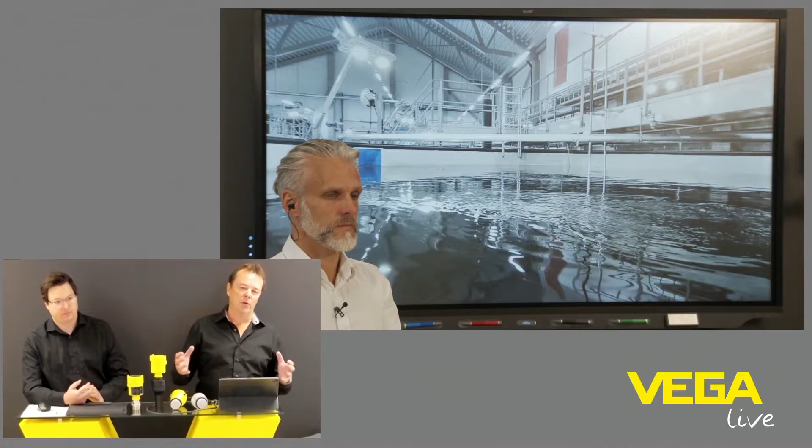In hatcheries, the small fish are born and live in small tanks on shore in the beginning. Then they are pumped into bigger tanks, which traditionally were located outside, beside a river or the sea, so they have access to plenty of water. You can imagine the harsh environment we have here in Norway, and worldwide, with lots of wind, rain, storm, and even snow. This makes a big impact on the measurement.

Today, most of these tanks are located inside because there you have better control of the environment, and you can also play with the temperature and the light. But inquiries and demands for these instruments are increasing, so we need a good, reliable sensor for everything.

So we thought we should give you some practical examples today, so you can see the difference between the ultrasonic and the radar. Let's start with the rain. It's not so easy to bring the rain into the office for you, Volker. But after rain there is always sun, so maybe you can show us what happens when it's sunshine.

Definitely, as you said, it's not a good idea to bring rain here into the studio, so we decided to show you another effect. To show you the difference between ultrasonic, which is this sensor, and the radar sensor on the right side, we have prepared this model for you. Both sensors are connected to this display, and you can see they have nearly the same value that they detect. Now I want to use this warm air blower to show what happens when wind is coming.

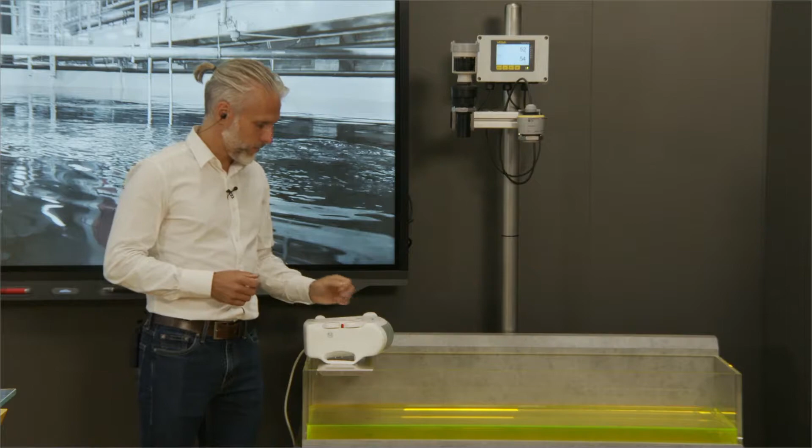So no rain, but wind, and especially what happens when there is warm wind, like we have now with this warm air blower. I'll turn it on right now, so a little bit of wind is coming. What is happening right now is the same as when you are talking to a friend close to the coastline. Due to the wind, sometimes you may not understand a word in a sentence - a word is missing, and then you have to ask again, hey, what did you say?

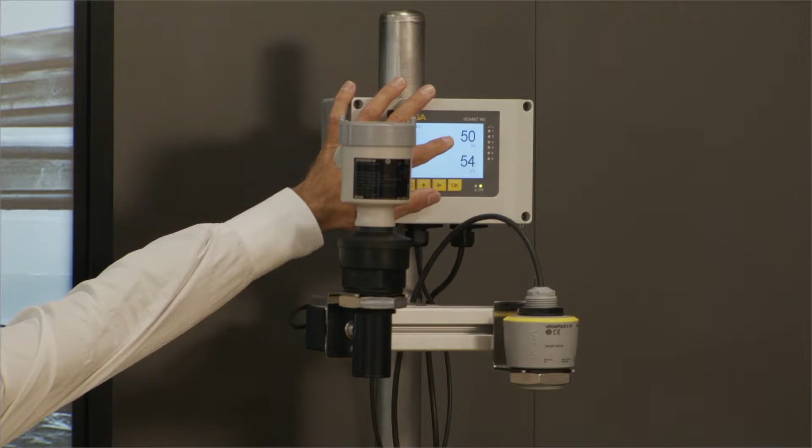This is the same with ultrasonic, because it is a mechanical wave, and due to that fact, the wave is blown away by the wind. You already see right now that the value from the ultrasonic sensor has changed from more than 50 to sometimes lower than 50. So there is a big impact on the measured value, and you may have big trouble when you measure with such an unreliable technology in your process.

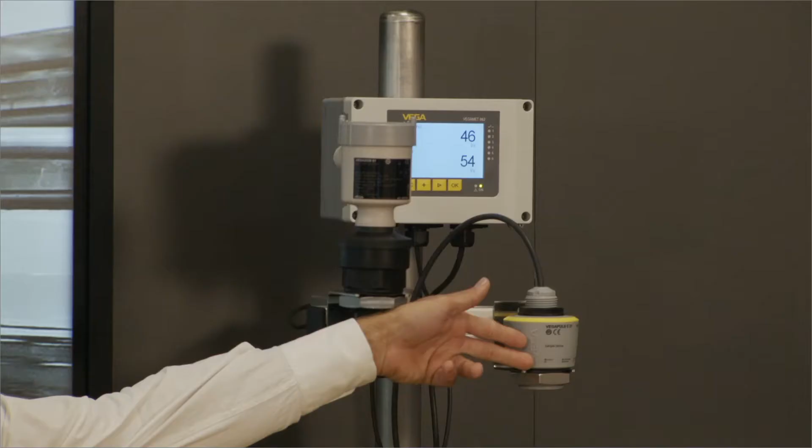Due to the fact that the radar sensor is not a mechanical wave, it's an electromagnetic wave, it is not influenced and not affected by warm air. So we have a reliable measurement with radar compared to ultrasonic. This is the first difference between those two technologies, and you see that radar is much more reliable when doing only a simple measurement in the tank of your fishes.

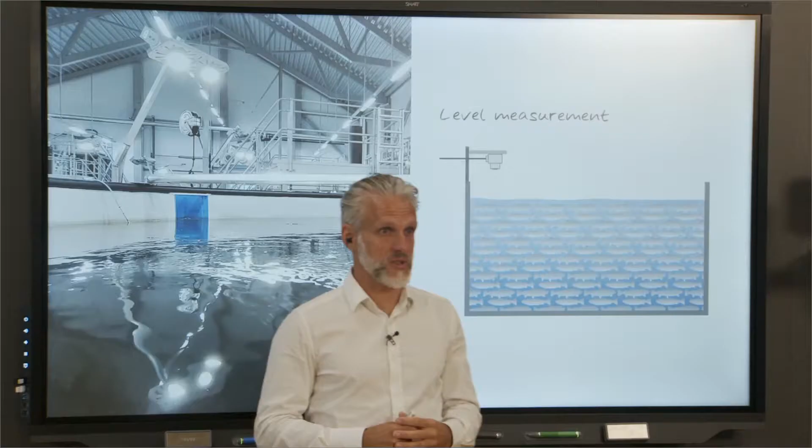So this is not the only technology we have, we have more. Right now we want to talk about another effect when comparing these two technologies. Nils, would you please tell me about another effect? I guess there are some more.

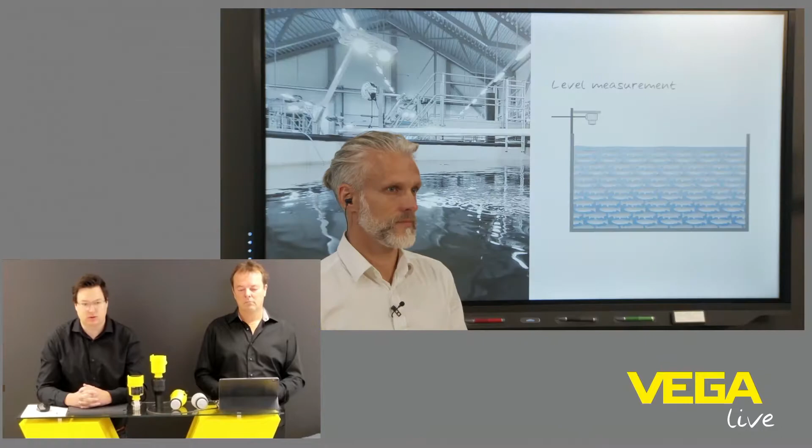Yes, it is. The fish tank is normally located outside, but we also have seen that some of these tanks, the new plants, are located inside. Due to the weather challenges, when the tank is located outside, the surface in the fish tank could be fluctuating. When we are also feeding the fish, there will also be a fluctuating surface, and both of these could be problems for a non-contact level measurement.

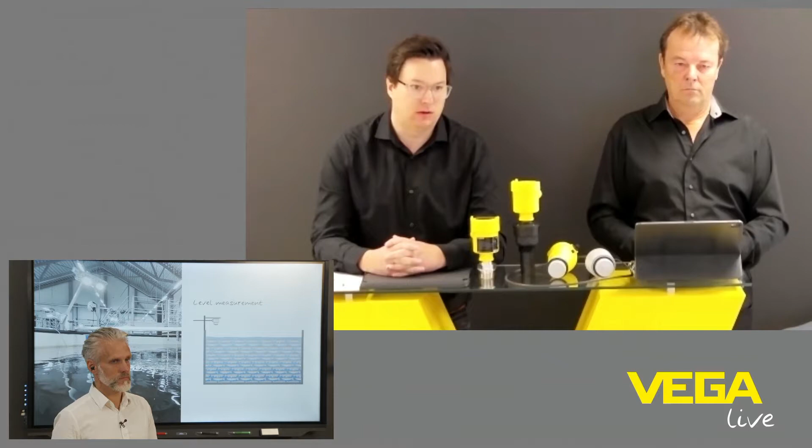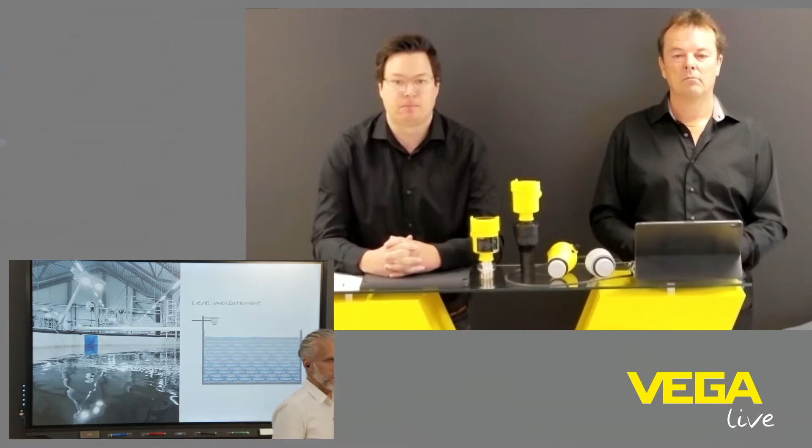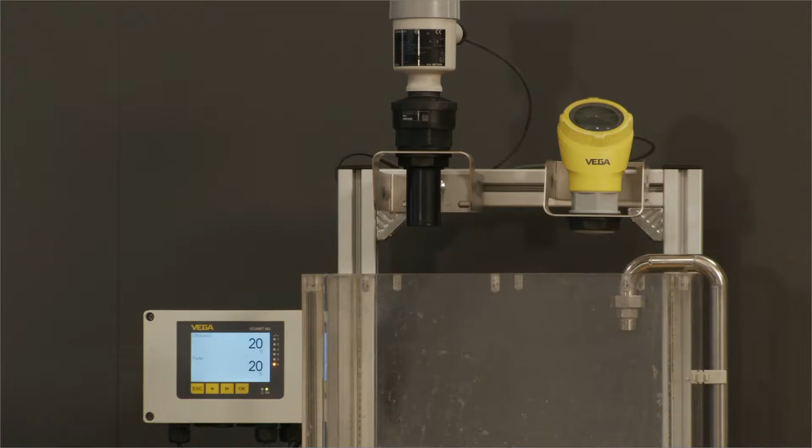So Volker, will you show us what happens between the ultrasonic and radar technology when the surface is fluctuating, for example in the fish tank? Yes, there is an effect, and this effect is very big when using technology like ultrasonic. To show you this, I have prepared this model here next to me - again, ultrasonic mounted on top and a radar sensor mounted next to it. Both show 20% of value, so both have a reliable measurement, but the water surface is stable, nothing is moving.

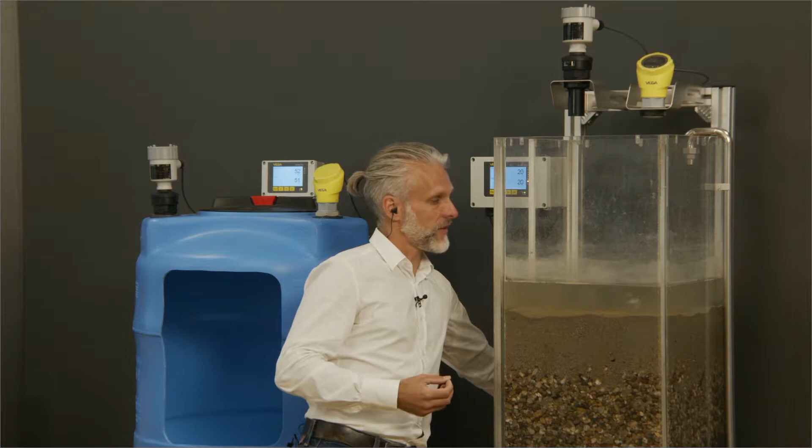Now I want to show what happens when bubbles are coming up. So please look what happens, even after a few seconds, bubbles coming up and causing a fluctuating surface. The ultrasonic has lost the value after only a few seconds.

The radar is still completely reliable, no change of value due to the fact that it's an electromagnetic wave and is not affected by such bubbles by a fluctuating surface. So this is one big advantage of radar.

There is another technology. We have not only radar, we have also hydrostatic pressure measurement, like we have with this sensor. This sensor is made with a ceramic cell, and this ceramic cell has one big advantage: it is very robust. So even when the sensor comes into a rough layer on the bottom of the tank, like this sand example, the ceramic cell is not influenced at all, and even in more harsh environments, the sensor is not affected by things like that.

You can get the sensor from us with a different cable length like you need. It doesn't matter which length, you can simply tell us and we will be able to deliver that for you. So this is the hydrostatic pressure measurement called VEGAWELL, a very well-known sensor used in big quantities over many decades.

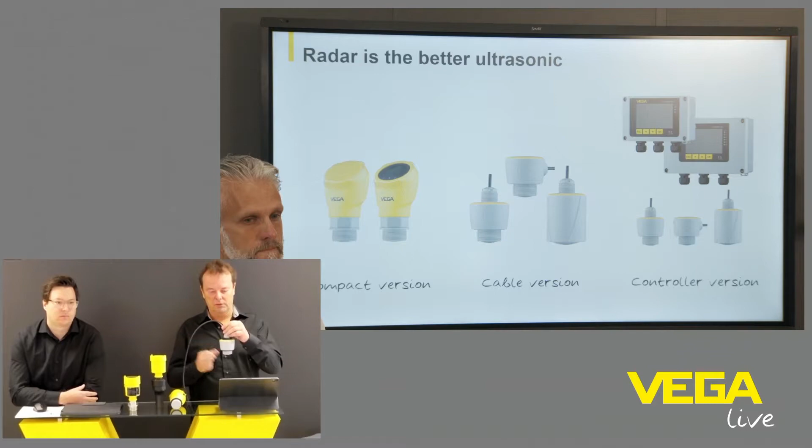So this is the radar, different versions we have. You can have them in an IP68 solution with a cable directly fitted on, in different sizes for different sizes of silos. Or if you like, you can have it as one complete unit, also with the possibility of an indicator. So these are the two versions that we have.

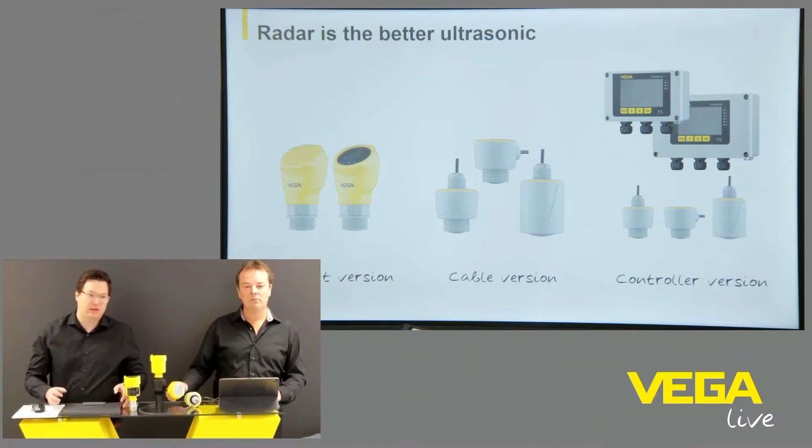And Nils, do we have other applications in this industry? Yes, the next application we want to talk about is the silage tanks. This tank, the silage tank, is a tank containing fish waste. The silage is normally used for manufacturing animal feed.

To stabilize the pH in these tanks, we add acid named formic acid. The silage is a very harsh medium. So if you want level measurement in such tanks, you need a technology that can handle the acid, the buildup, the cleaning products, the foam, the gas, etc. So it's not very easy to have level measurement in such tanks.

Paul, would you mention or show us the first top-mounted solution for level measurement in silage tanks? Yes, but first, did you know that formic acid absorbs sound waves? So it's important to choose a technology which is able to handle the condition inside the tank. In this case, we will use a radar, and maybe we should show the audience the difference between ultrasonic and radar when it comes to gas.

Volker, you have to help me since you are in Germany. Can you please show us the tank with the gas? Yes, I can.

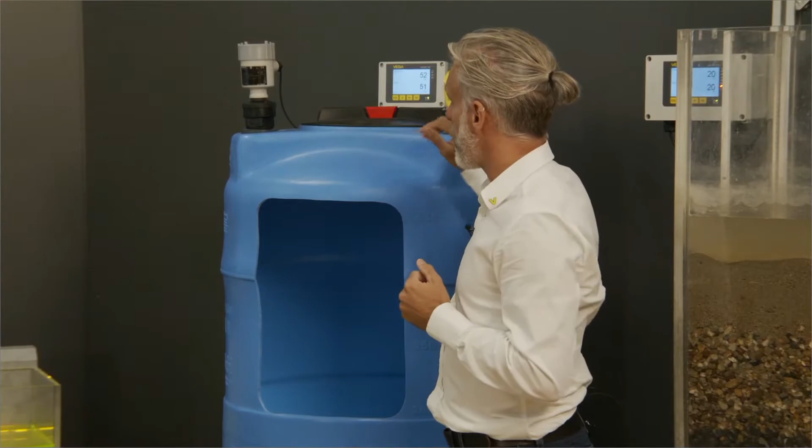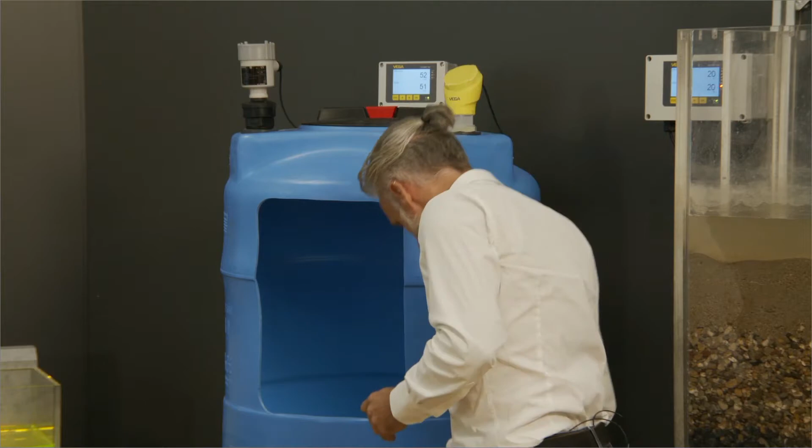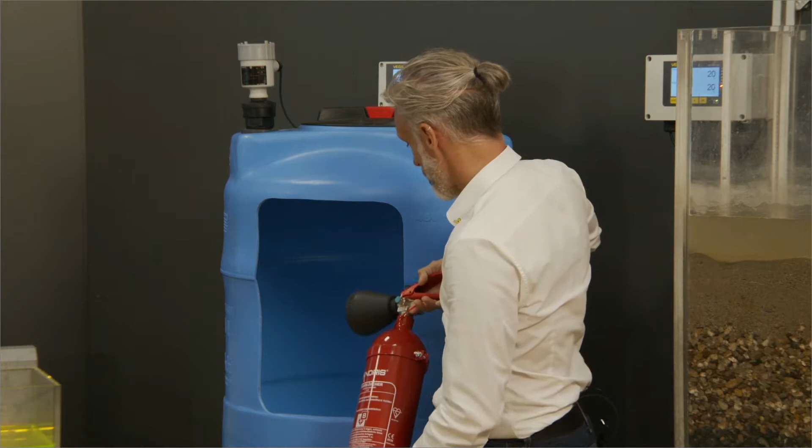As Paul said, gas affects ultrasonic, and ultrasonic is a mechanical wave. But radar is an electromagnetic wave, and that is not affected by gas layers. I have this model next to me, where we again have our ultrasonic sensor and our radar sensor. Both have nearly the same value that they measure, and now I want to show you what happens when I create a gas layer on top of the liquid inside this tank. For that, I have this carbon dioxide here, and now I want to blow some carbon dioxide into that tank. So give attention. 3, 2, 1, go!

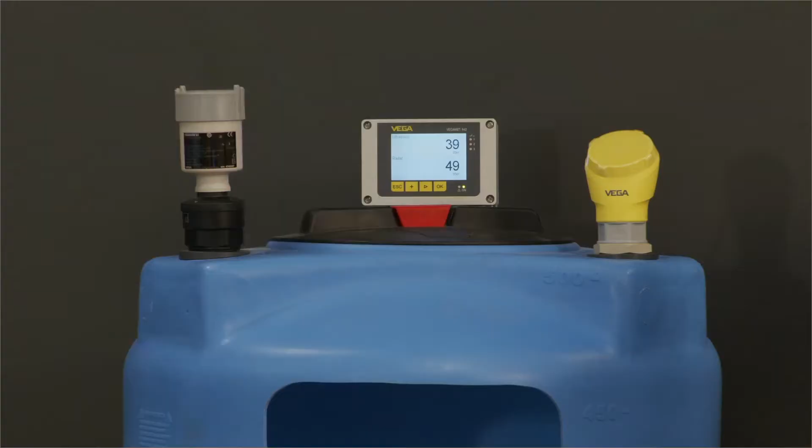You immediately see a really big impact on the ultrasonic sensor. The ultrasonic sensor shows a change of more than 20% of the value. This is due to the gas layer on top of the liquid. Whereas the radar sensor is stable and does not show any influence on the value. This is a big difference, and especially in this application, it may help.

Furthermore, there's another advantage that I want to show you: you're able to measure through the tank wall. Because radar is not affected by plastic, you're able to measure without a hole in your tank wall. So this is a very big advantage of radar and can help you when you do not want to have any holes in your tanks.

So this is the advantage from our top-mounted solution. Nils, do we also have a bottom-mounted solution that can help?

Yes, we could use a pressure transmitter mounted in the bottom of the tank to measure level in the silage tank. And when we are talking about level measurement in such a harsh medium, we need a sensor that could be in contact with the acids and cleaning products in the tank, but we also need a sensor that could easily be cleaned if necessary.

So this is the VEGABAR 82, our high-end pressure sensor with an absolutely front flush ceramic version. We also added a seal inside that could handle the formic acid and the cleaning products. You could also take the sensor out and easily clean it with a steel brush without making any damage to the sensor.

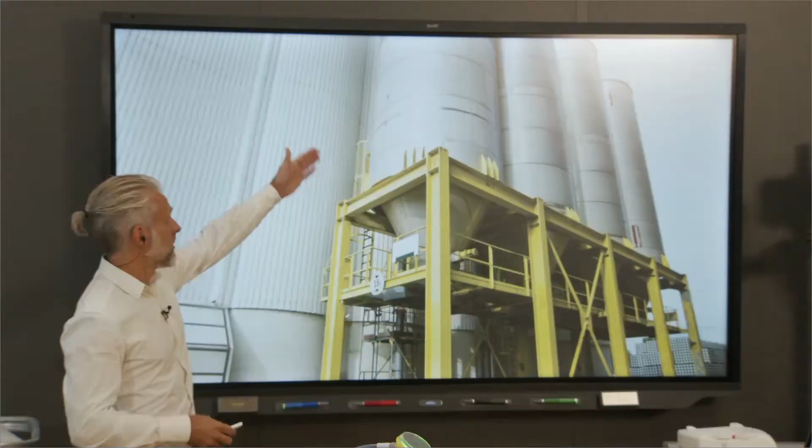So of course, not only chemicals, not only silage is in the process. Of course, the salmon grow up from 0 up to 5 kilograms. They need more, they need food, they need a lot of food. And for that, companies produce fish food. They are on site, typically close to the coastline, stored in big tanks.

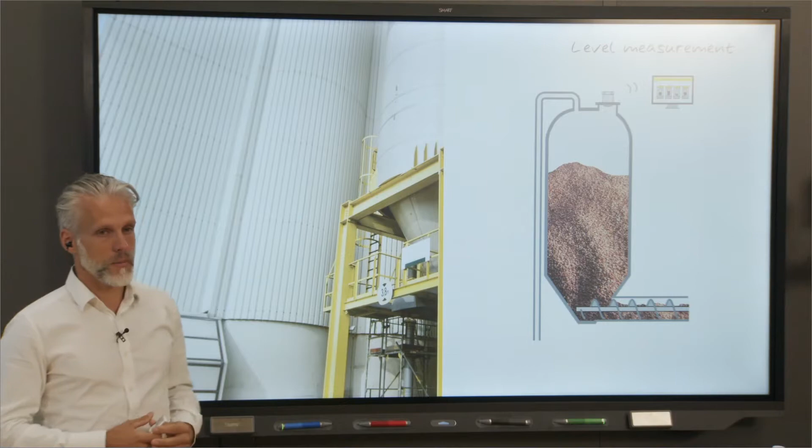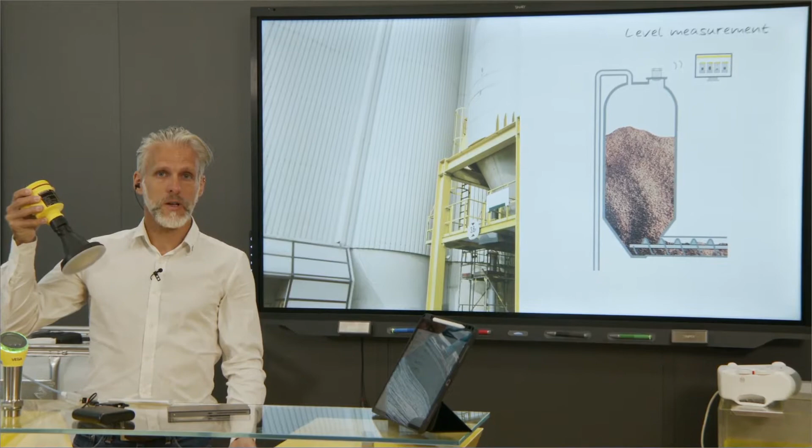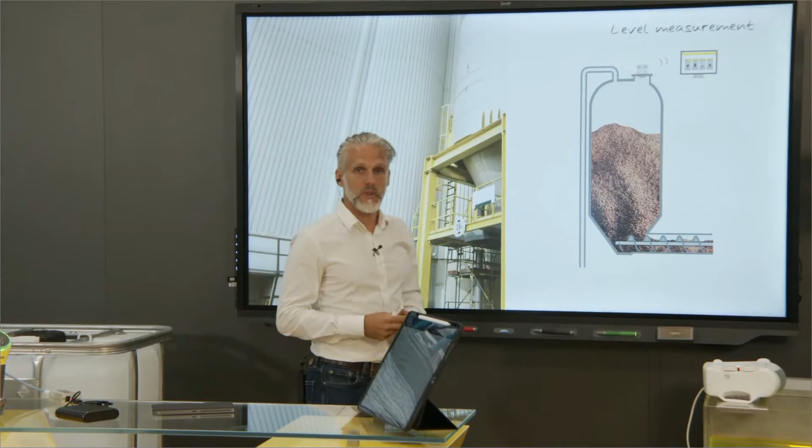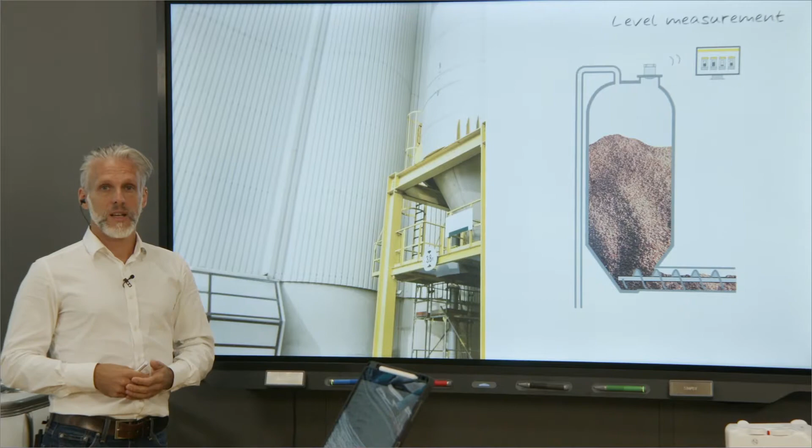And there you need a measurement. This measurement can be, for example, our VEGAPULS 69. The VEGAPULS 69 is our solution for up to 120 meters of distance to measure. This sensor has very good sensitivity and helps you to work even in those dusty environments where the fish food may create build-up or a dusty environment. The VEGAPULS 69 is mounted on top, like always with our radar sensors, and it can handle those difficult measurements because it has to deal with build-ups and the dusty environment created from the pellets.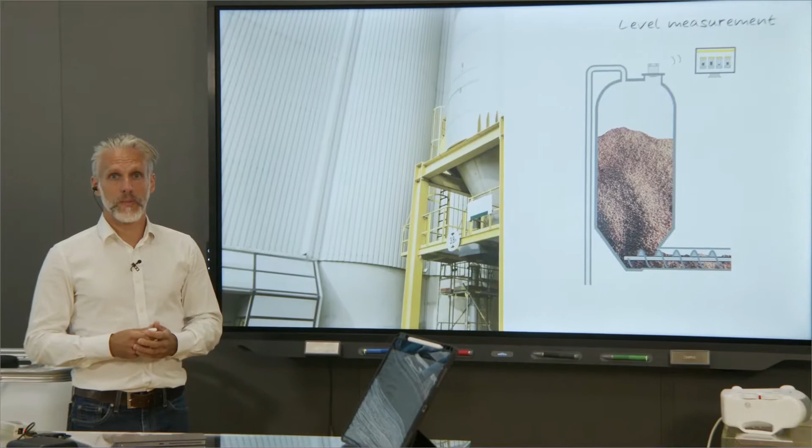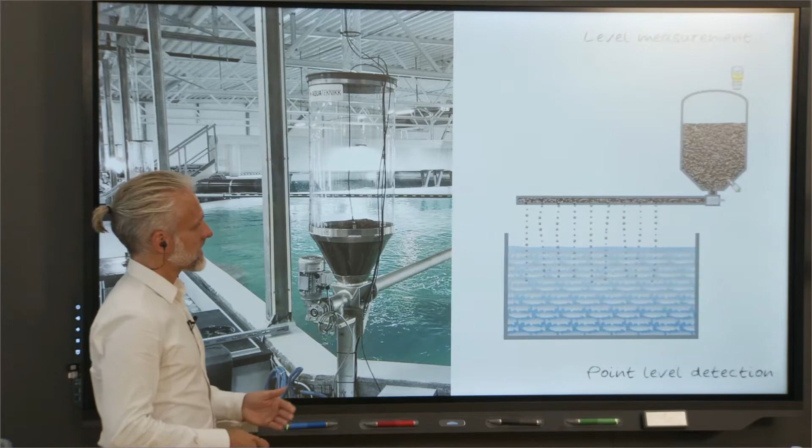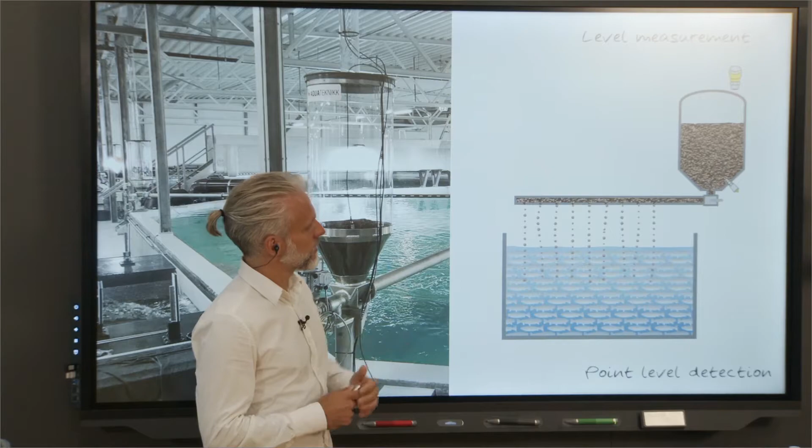Then the food needs to come to the place where the fishes are. It's the fish tank again, and there you have a feeder close to the fish tank, which brings out the food pellets to the fish. There again, you need a measurement that is reliable, and here again radar is a very good solution because it can measure through the glass. It is possible to mount the sensor outside of the tank, so you have no contact with the food, and can then ensure you have no things in your tank that you don't like to have.

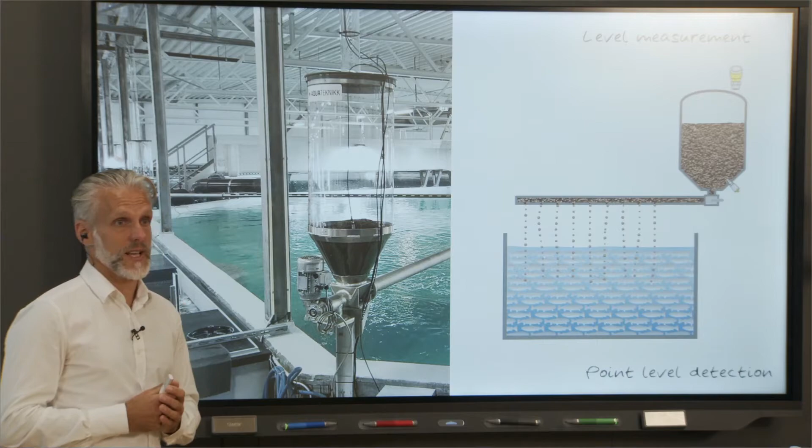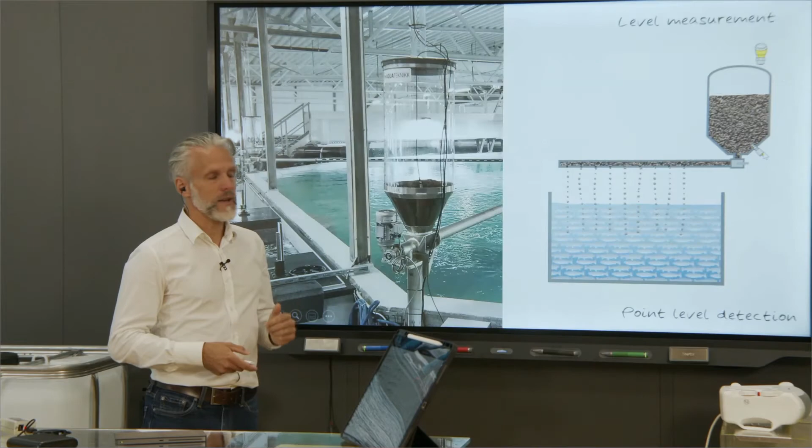Maybe you need a dry run solution, and for that we also have a solution. It's a point level detection on the bottom side of that tank if you want to prevent any kind of dry run close to the engine.

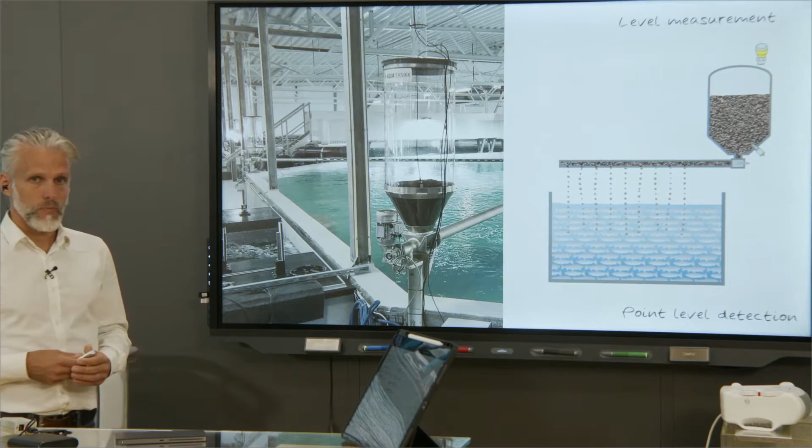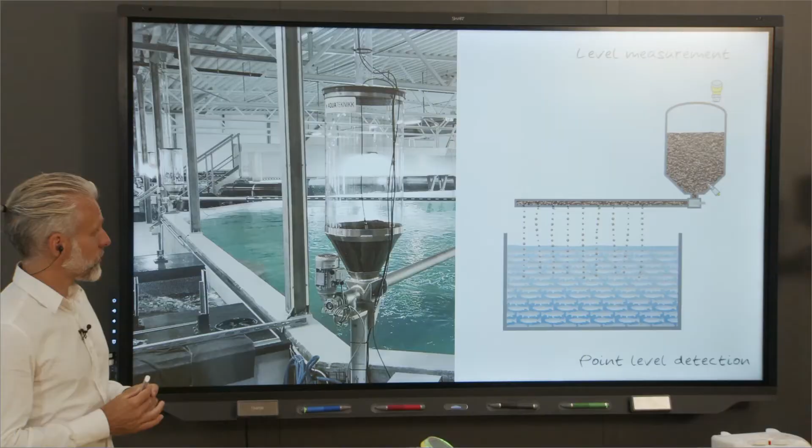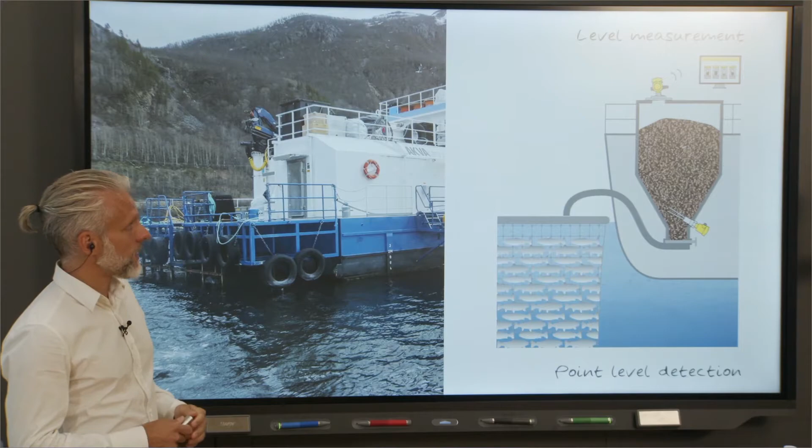So when the fish have grown up, they go outside, to the so-called grow-out tanks, which are typically offshore when salmon is produced. And when the fishes are offshore, they again need a very big amount of food, and this food is typically stored in feeding barges. These feeding barges have a few tanks inside, and there again you have the possibility to use our VEGAPULS radar sensor on top of the tank to send the data to a cloud system and manage your feeding and logistics.

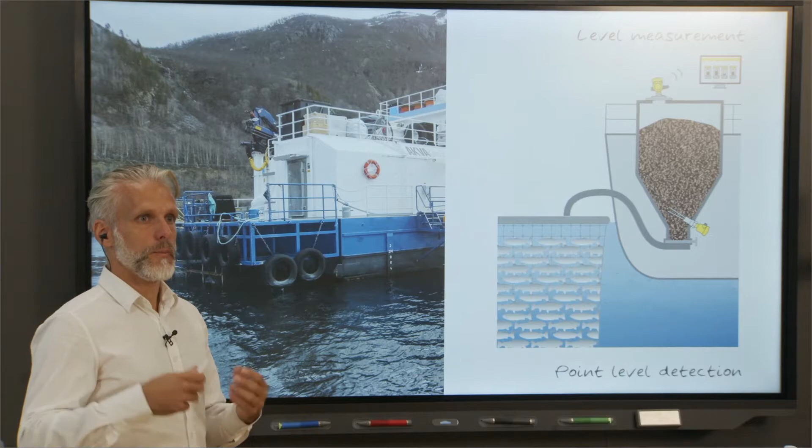Furthermore, you want to prevent that there's any dry run, so therefore we also have the possibility to add such a point level detection on the bottom side of such a tank. Be aware, these are ships, and for sure there are quite a lot more applications here. There are diesel tanks where you want to store some fuel. There are ballast tanks. There are many, many more pressure measurement locations and measurements which can be done by VEGA

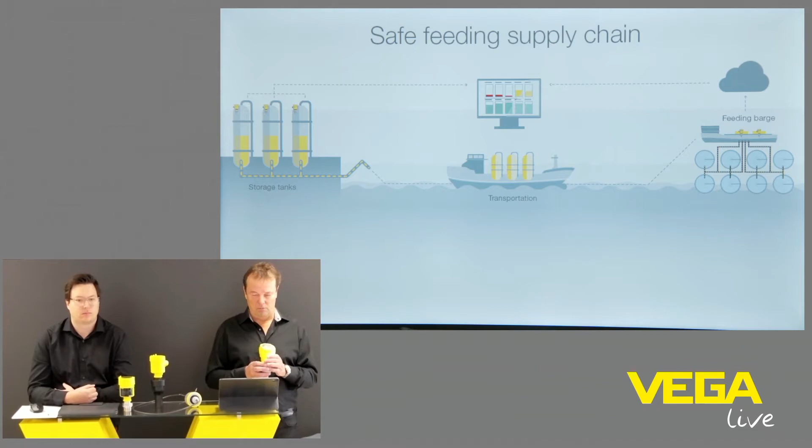The sensors on each location are exporting the signals in different ways. For example, it can have a built-in SIM card and act like a mobile phone. We are using the NB-IoT. Maybe also you are familiar with the LoRa networks, and if not, we can inform you about this. Maybe you have a network already, and if not, we can make one for you. So these are the different possibilities we have for displaying in the unit.

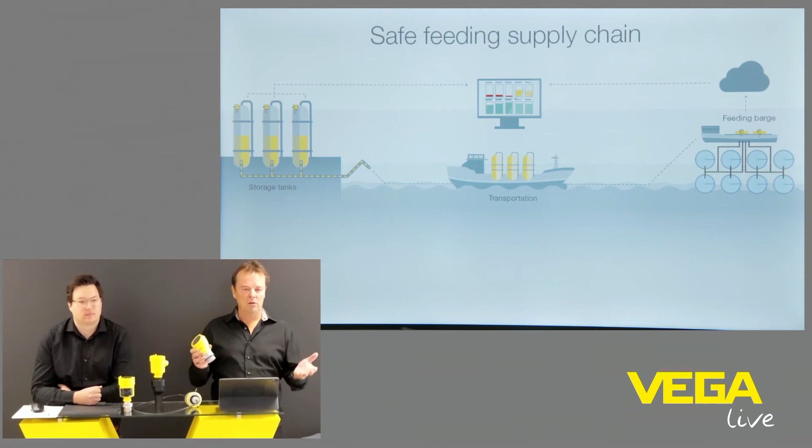And all of our sensors, they are calibrated at the factory. So a radar knows that a meter is a meter. But Volker, we need to set it up when the customer receives the sensor at site. We need to adapt it to the local application. And for this, we need a simple way of doing it. Can you tell us about a simple way to set up the sensor? Can anyone do this? Yes, of course.

We have one of the easiest solutions that you can imagine. You can do it by a smartphone. You can set up our sensors from everywhere. So stand 5 meters away from where your sensor is mounted on top of the tank and connect to your sensor by using our VEGA Tools app. This VEGA Tools app, which you see here on this tablet, is available free of charge in all our app stores worldwide. So it's free of charge and available all over the world.

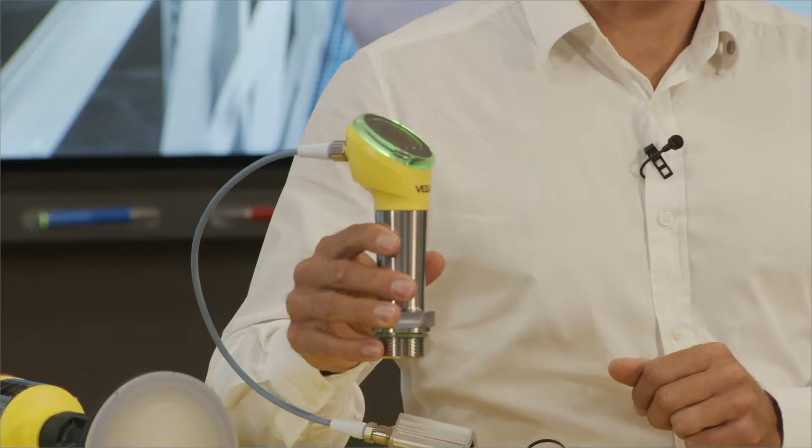What else do you need? You need a sensor. For example, this pressure sensor here has the Bluetooth technology integrated and therefore can be connected to our VEGA Tools app. If you want to see what is going on when the pressure rises, you see a certain amount of pressure is reached and the sensor changes to another color, here in that case blue.

And now I want to show you how easy it is to connect to this sensor and to change any kind of settings. For that, I select the right sensor in the app, click on it, and then automatically the sensor is connected to the tablet. It is indicated by a flashing of the LED, and then we are already online. Nothing more to do. Now we want to change something.

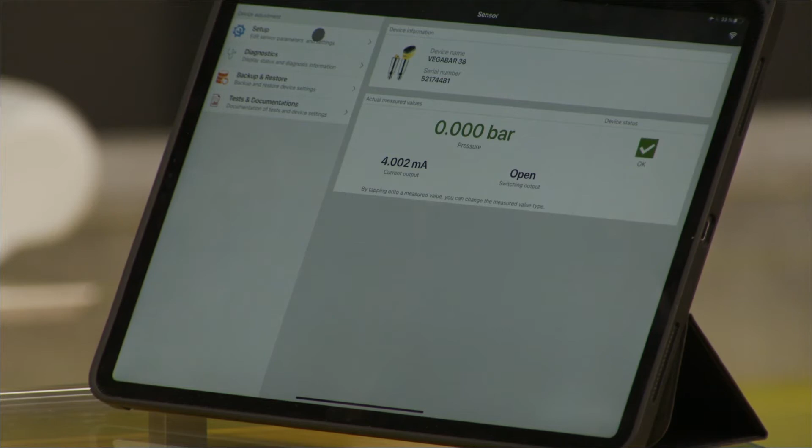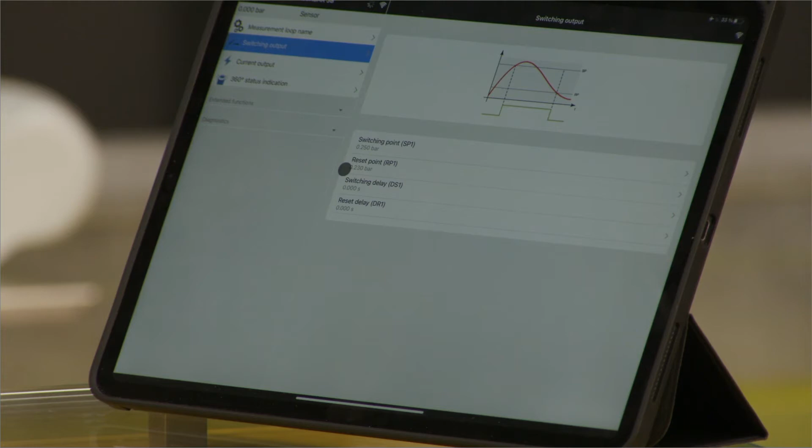Currently we have 0 bar, 4 milliamps output, and now we want to change something. For that I enter this menu, and here you can change everything on the sensor. You can, for example, simply change the switching points where your output changes the state, or, another example, change the indication. As I already said, blue is when the pressure rises, and here we want to change this now, let's say to yellow, because of course we love yellow.

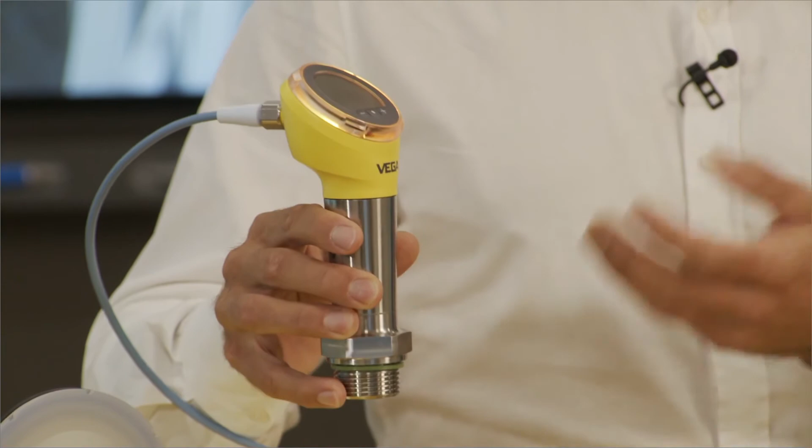We change it to yellow, and now I want to show you what happens when the pressure rises. We have no more blue indication, we have the yellow indication. So a very good thing to adjust the sensor to your needs. If you want all of your system to have the same lighting, you have the possibility to change this in a very easy way with the help of our VEGA Tools app.

This is not only possible for this small pressure sensor or for our point level sensors. This is also possible for all of our plics series, for example this VEGAPULS. Here we have a solution which is called the PLICSCOM with Bluetooth. It's very easy, just mount it on the sensor and you can do the same things as I mentioned before with the pressure sensor. No more settings, nothing else, just mount it on your plics sensor and it works. So this is how easy our setup can be done. A very good idea, I think.

And Paul, what does our customer think about that? Can you tell us how the customer appreciates this? And we are nearly coming to an end. What is your summary regarding the aquaculture industry? This feature with the programming is very helpful for the customers. They can store units in their local stocks and very, very easily adapt them to new applications.